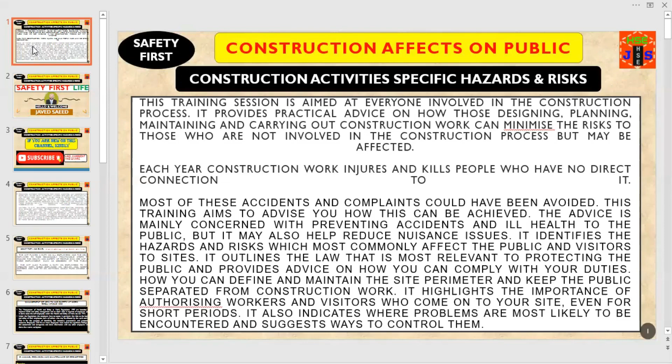It also indicates where problems are most likely to be encountered and suggests ways to control them. Basically, this training is aimed at everyone involved in the construction process. It provides practical advice on how those designing, planning, maintaining, and carrying out construction work can minimize the risk to those who are not involved in the construction process but may be affected.

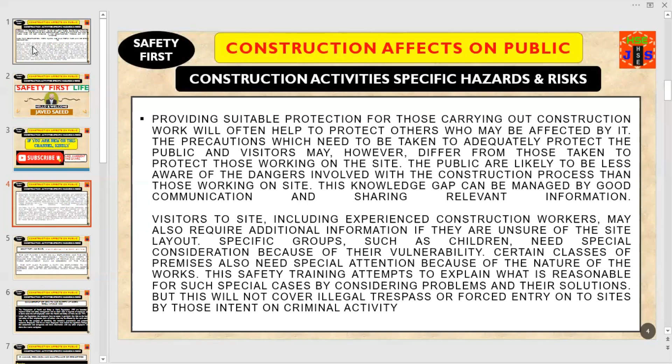Dear friends and colleagues, visitors to site, including experienced construction workers, may also require additional information if they are unsure of the site layout. Specific groups, such as children, need special consideration because of their vulnerability. Certain classes of premises also need special attention because of the nature of the work. This safety training session attempts to explain what is reasonable for such special cases by considering problems and their solutions. But this will not cover illegal trespass or forced entry onto the construction site by those intent on criminal activities.

First of all, let us look at what the law says about public safety. We'll go through the Health and Safety at Work Act 1974. The Act places a duty on all employers and the self-employed to take reasonably practicable steps to ensure the health and safety of people who are not in their employment, such as members of the public.

The Act also places a duty on employees to cooperate with their employer on health and safety matters and not to do anything which puts others at risk. So it is clear cut, a legal requirement. Keep in your good mind that to protect the public from the harms of construction activities is a legal responsibility of the employer as well as of the employees.

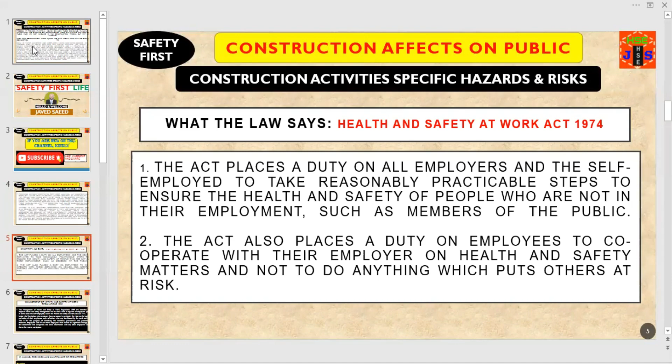Another regulation, the Management of Health and Safety at Work Regulations 1999, is intended to improve health and safety management and to detail what is required of employers, and in some cases the self-employed, under the Health and Safety at Work Act 1974. Under the regulation, employers have to assess in particular the risk to the health and safety of their employees and of others who may be affected by the work activities.

This is for the purpose of identifying the necessary preventive and protective measures. Employers with five or more employees must record the significant findings of this assessment and cooperate and share information with any other employer who is sharing the same workplace.

Today we are discussing how we can protect people, the public, from the adverse impacts of construction activities. Here stage number one is planning, provision and maintenance of perimeters. For most sites, the perimeter is a geographical area within which construction work will be carried out. Determining this perimeter is an important aspect of managing public risk.

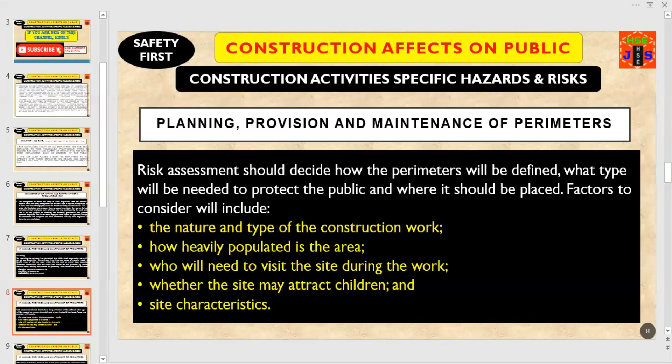Risk assessment should decide how the perimeters will be defined, what type will be needed to protect the public, and where it should be placed. Factors to consider include the nature and type of construction work, how heavily populated the area is, who will need to visit the site during the work, whether the site may attract children, and other site characteristics. Based on these key points, you have to decide what type of perimeter is required to protect the public from the construction area.

When planning for the delivery of materials, there are many precautions that can be taken to ensure people outside the site are protected, including eliminating reversing into the street or onto site by providing one-way systems and turning areas within the site where possible, and providing specific drive-in loading areas for safer movement of goods onto the site. Plan deliveries to make sure they don't coincide with heavy pedestrian traffic, such as children going to school, and consider scheduling deliveries outside of large movements of people, such as rush hours or school journeys.

However, for higher risk activities, such as using cranes or forklift trucks to unload vehicles, it may be necessary to temporarily extend the existing site perimeter while this work is carried out. Alternative pedestrian routes may be required, and this will often need permission from the local authorities.

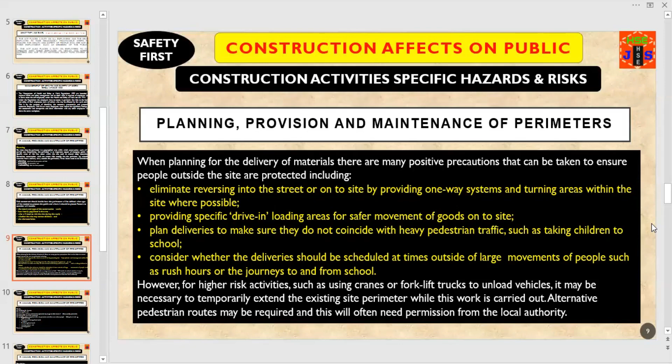To summarize, in the planning stage you have to identify the hazards, assess the risk, eliminate risk from construction operations by design or other means if reasonably practicable, define the areas to be protected, and identify what is required at the site perimeter and other areas where people may be at risk.

For example, large hoardings, 2 meter sectional fencing with closed mesh, 1 meter fencing, 2 meter fencing with broad mesh, security cameras, and security guards.

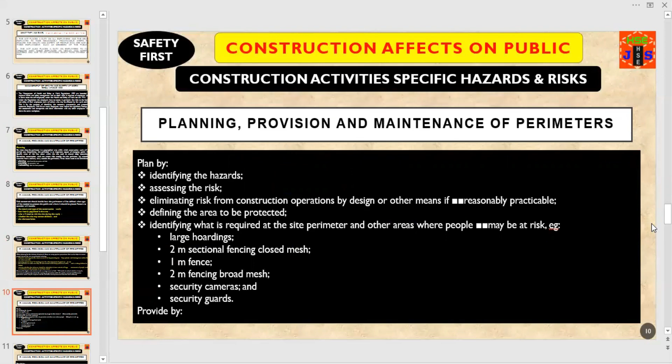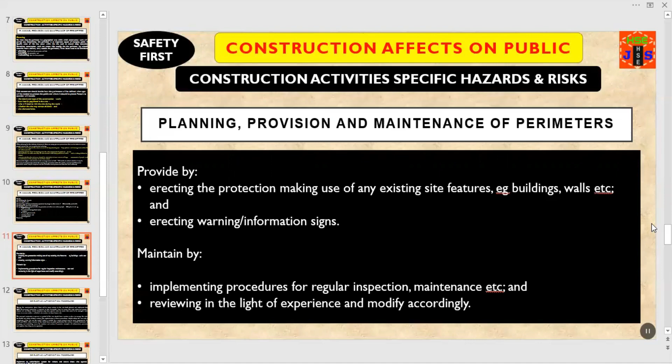After the planning stage, you have to provide protection by erecting it, making use of any existing site features, for example buildings, walls, etc., and erecting warning and information signs to raise awareness of the public. Lastly, it is also the responsibility of the employer to maintain this by implementing procedures for regular inspection and maintenance, and reviewing in light of experience, modifying accordingly if conditions demand it.

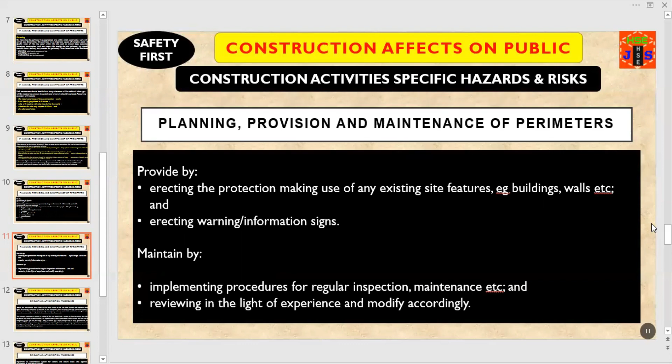Dear friends and fellows, you are on the platform of Safety First Life. Today we are discussing how the public can be protected from the adverse impacts of construction activities.

During the construction phase, there will be many visitors to the site, both planned and unplanned. Under CDM, the principal contractor is required to take reasonable steps to ensure that only authorized people are allowed on site. Some clients may have specific rules or needs that need to be managed, such as access to an area within a refurbished site, or visitors to show homes. The principal contractor, as person in control of the site, should have a system in place to manage the risk to the health and safety of these visitors.

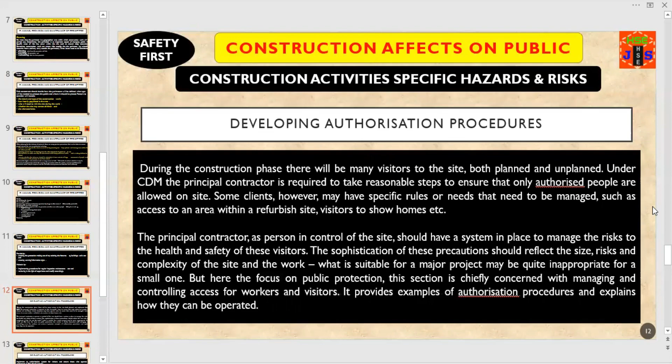The sophistication of these precautions should reflect the size, risk, and complexity of the site and the work. What is suitable for a major project may be quite inappropriate for a small one. But here the focus is on public protection, how to manage and control access for workers and visitors.

Remember, you have to implement an authorization system for visitors and ensure those who operate it understand it. This should include a readily identifiable reporting point, providing safe access between the site entrance and the control point, making sure the route between the entrance and the reporting point is clearly marked, providing appropriate information on site rules, hazards, and special precautions, provision of personal protective equipment, and making sure people are accompanied around the site and issued with a specific identity card if needed.

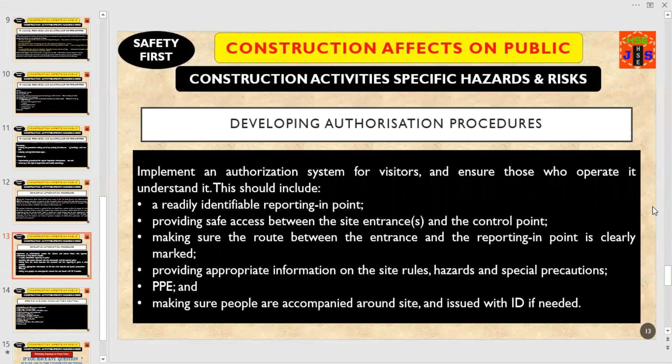This is the way how you can authorize and control public entry in the construction area.

If you are a safety practitioner or safety advisor on that specific project, you will learn how you can maintain, implement, and suggest precautionary control measures to your management to keep the public safe and protected, and how you can avoid public nuisance and legal action if there is a complaint by a member of the public. You will learn one by one the hazards, the dangers, and the control measures, hopefully in the upcoming video.